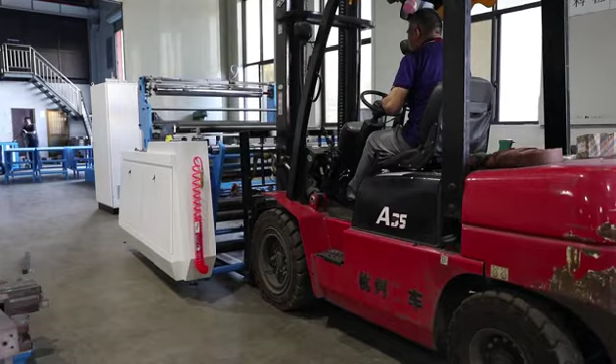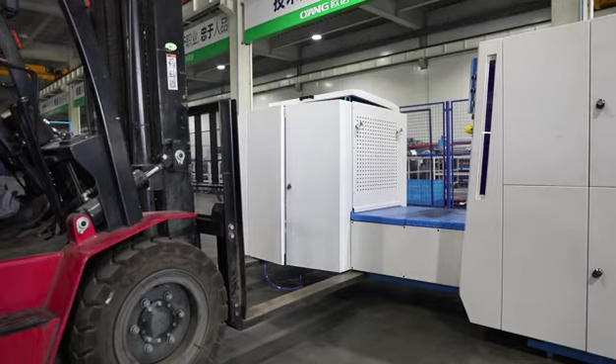Feeding unit fork down demonstration. Main back body folding unit fork up demonstration. Main back body folding unit fork down demonstration. Collection unit fork up demonstration. Collection unit put down demonstration.

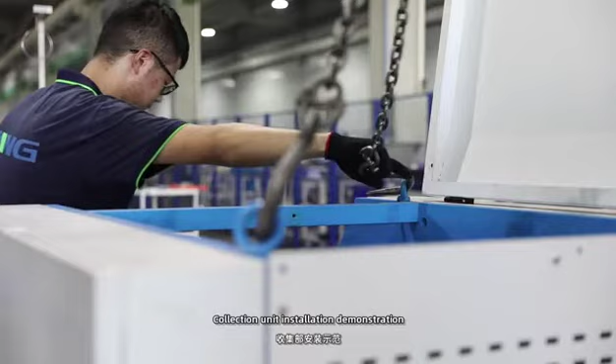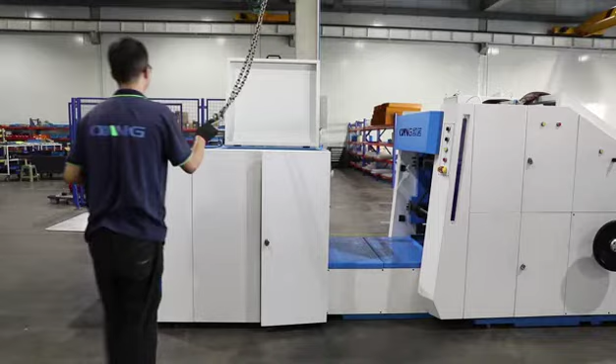Distribution cabinet fork up demonstration. Distribution cabinet put down demonstration. Collection unit installation demonstration. The chain link of the collection unit.

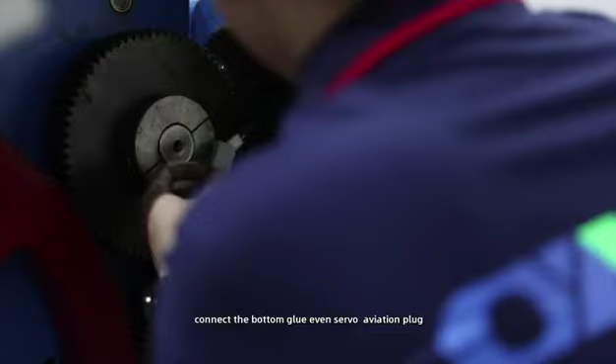Wiring and the connection. Wiring. Remove the wire from the electric cabinet. Pull the cable out of the cabinet according to the path. Connect the bottom glue servo aviation plug. Connect the bottom opening servo aviation plug.

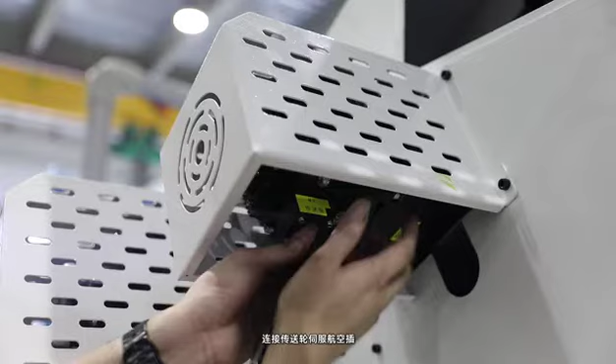Connect the main drive servo aviation plug. Connect the transmission wheel servo aviation plug. Connect the tube cutting servo aviation plug. Connect the traction servo aviation plug. Connect the thumb knife servo aviation plug.

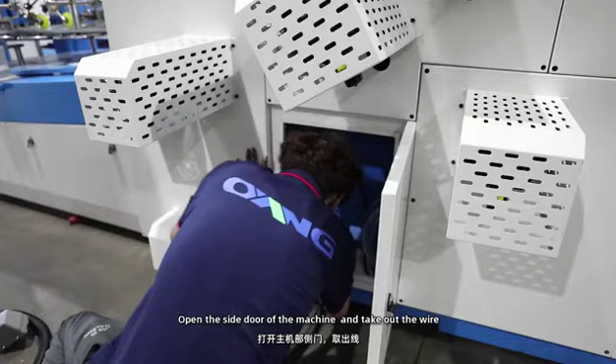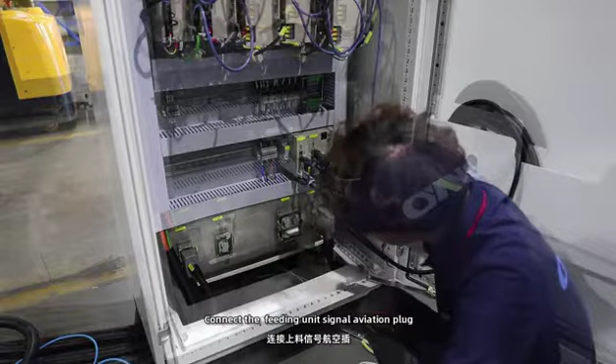Open the side door of the machine and take out the wire. Open the side door of the unwinding unit and take out the wire. Connect the feeding power supply aviation plug. Connect the feeding unit signal aviation plug. Connect the machine signal aviation plug. Connect the communication line. Connect the aviation plug of the vacuum pump.

Connect the color code plug. Connect the main power as required. Turn on the side power supply. Turn on the main power supply. Servo alarms.

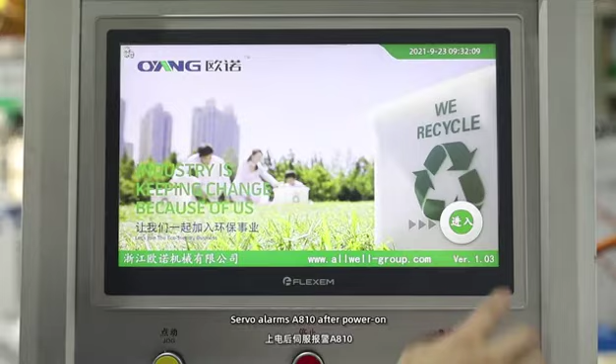A810 after power on. Click on the touch screen to enter. Then click the alarm interface. Then click the servo alarm. Then reset the servo driver with alarm. After the power is off, wait 1 minute and then restart.

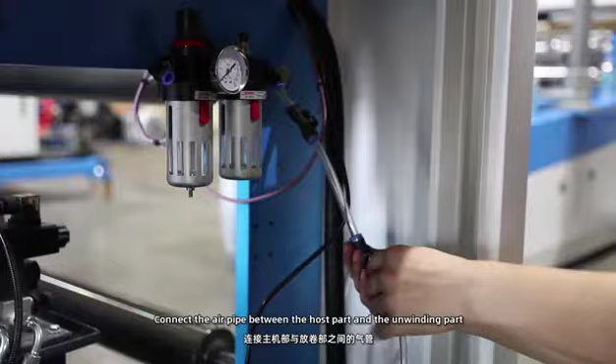Servo alarm clearing. Connect the air pipe between the host part and the unwinding part. Connect the air pipe of the side glue pressure bubble. Connect the main air pipe to the unwinding part.

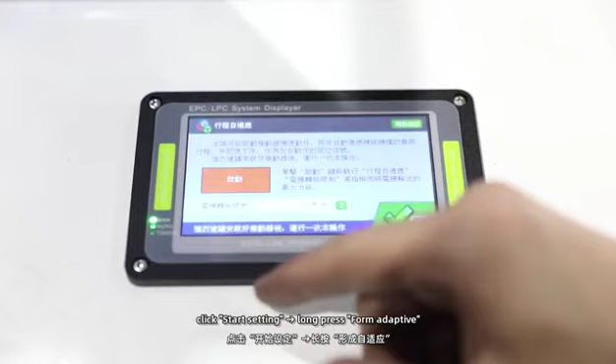Click Setup. Then click Setup Wizard. Click Start Setting. Then long press Adaptive and click Start. The correction system will start to detect limits. Click back after the detection is successful. Then click Next. Click the left and the right arrows.

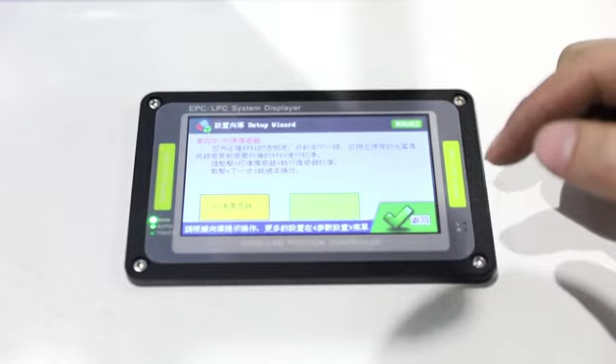The correction device can swing right and left normally. Click Next. Then select photoelectric sensor. Then click Next. Click Next. Then change to automatic mode. Change polarity to plus and change gain value to 20. Double click to return. The setting of the automatic correction system is completed.

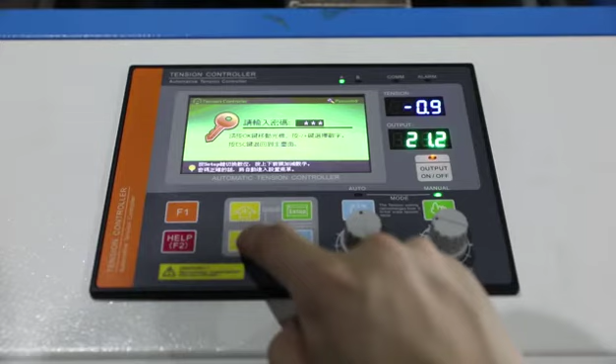Automatic tension system setting. Click Setup. Then enter password 0100. Select checker parameters. Click Setup. Select checker 0 set. Enter the 0 interface. And long press the setup to start setting. Then check value to 0 and click back.

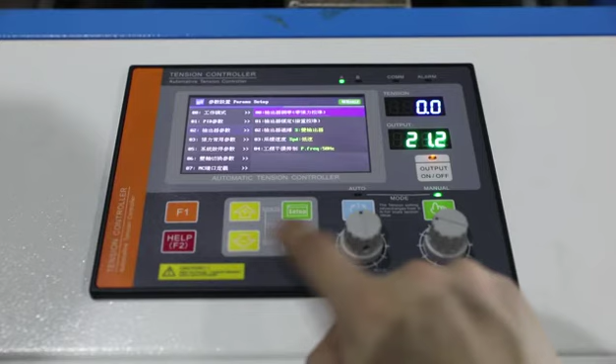Select hand weight calibration. Set weight to 25 kg. Put 25 kg weight through the tension checker. Keep weight fixed. Tighten the rope. Then long press setup. The test value and the set value are 25 kg. The setting of the automatic tension system is completed.

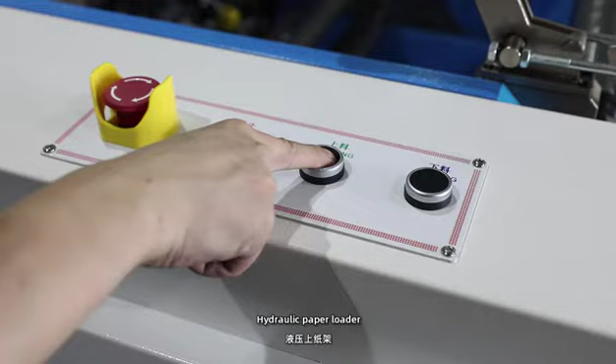Hydraulic paper loader. Long press the feeding and the unloading buttons respectively to check whether the feeding swing arms run smoothly. If there is no abnormality, check whether the oil gauge pressure is 500 to 1000 psi after the loading swing arm is placed at the lowest end. If the feeding swing arm runs stuck, adjust the oil cylinder knob.

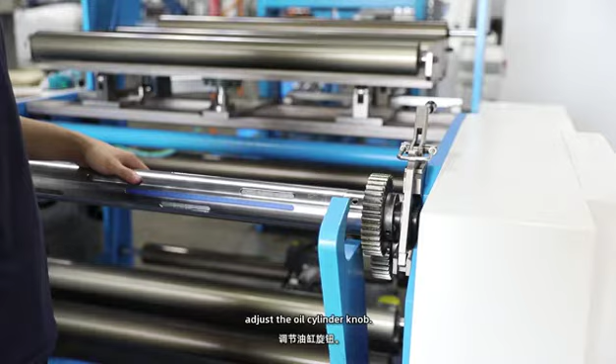Loading the paper. Open the air shaft buckle. Move the air shaft to the feeding swing arm. Long press the unloading button to lower the air swell shaft. Get the air shaft through the paper roll. Move the paper roll to the feeding rack. Long press the feeding button. Lock the buckle on both sides.

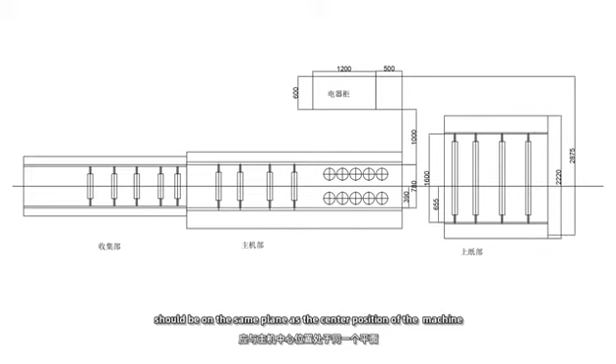Lateral position of raw material: bonding width plus gusset of paper bag plus half surface width of paper bag. Center of the paper bag. The center position of the paper bag should be on the same plane as the center position of the machine.

After the equipment is correctly arranged according to the equipment layout diagram, the distance between the center of the paper bag and the wall board is 655 mm, and the paper roll position is set correctly. Then inflate the air shaft.

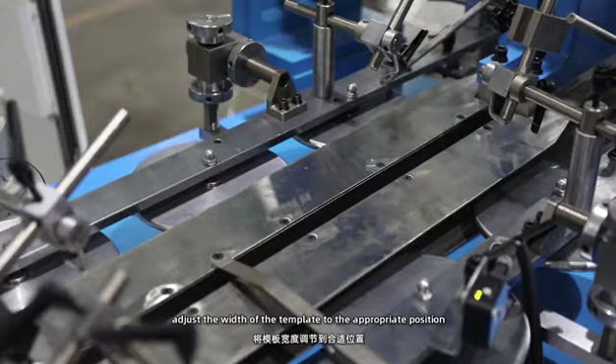Adjust the width of the forming template. Loosen the fixed hand wheel. Rotate the template adjusting hand wheel and adjust the width of the template to the appropriate position. Adjust the toe part of the forming template. Loosen the knob on the stable support arm.

Adjust the support arm so that the forming template is aligned with the center line of the machine and parallel to the wall on both sides of the machine. The width of the toe part of the forming template is slightly greater than the width of the ankle part of the forming template. Check whether the forming template is aligned with the traction wheel.

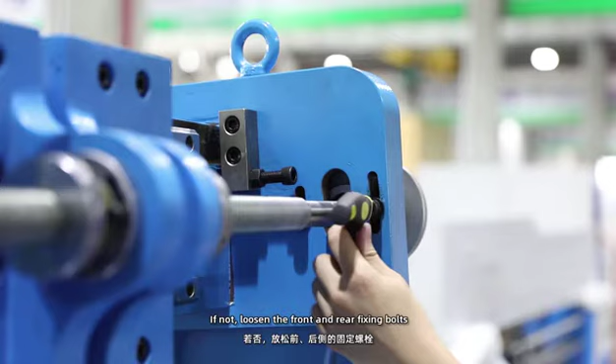If not, loosen the front and the rear fixing bolts, a total of 8 fixing screws. Loosen the fixed nuts of the front and the rear adjusting bolts. Adjusting the screw with clockwise rotation can raise the forming template toe.

Turn the adjusting screw counterclockwise to lower the toe part of the forming template. After setting, relock the fixed nut and bolt.

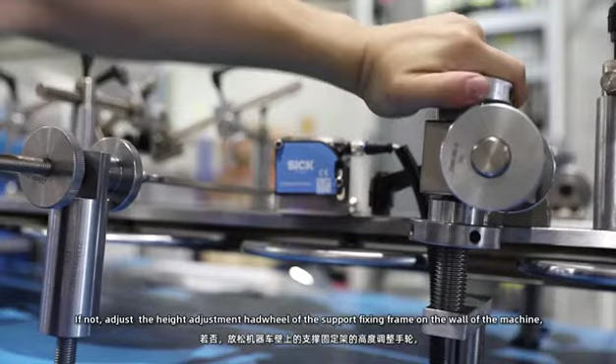Check the height of the clamp side round plate. Check whether the clamping plate is in the center of the two forming templates. If not, adjust the height adjustment hand wheel of the support fixing frame on the wall of the machine, and adjust the support fixing frame upward or downward according to need by using the height adjustment hand wheel. After the adjustment, lock the height adjustment hand wheel. Set the height of the clamp side round plate in 4 positions in turn.

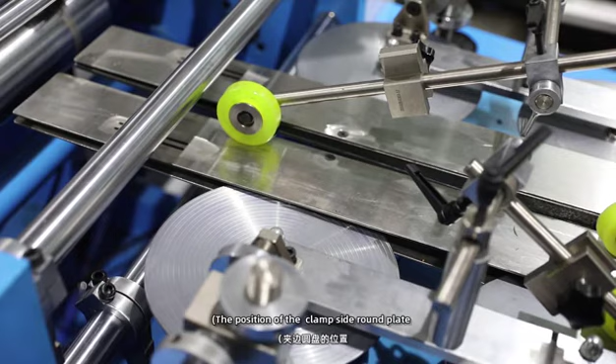Set the lateral position of the clamp side round plate. Loosen the clamping knob on the hand wheel of the clamping side round plate. Rotate the clamp side round plate adjusting hand wheel until the edge of the forming plate is aligned with the correct scale on the clamp side round plate. The position of the clamp side round plate should be half of the side gusset of the paper bag. After adjustment, lock the clamping knob on the adjusting hand wheel.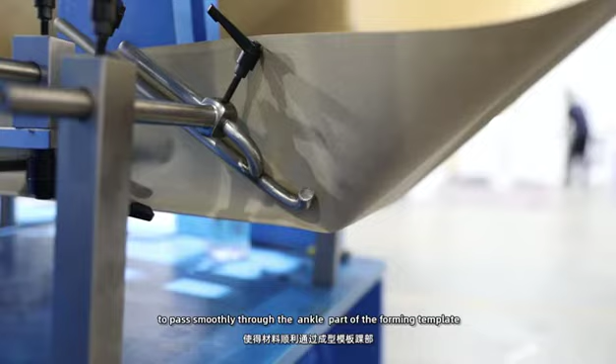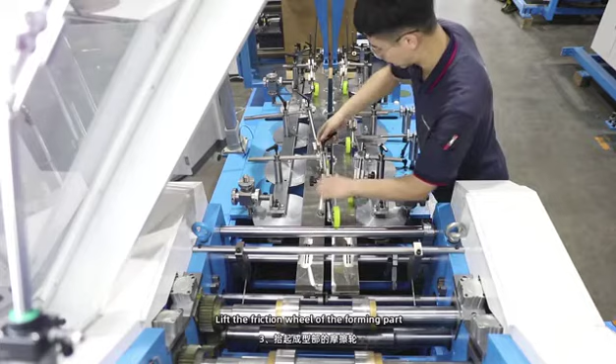Set the guide rod of the forming template. Adjust the screw handle to allow the material to pass smoothly through the ankle part of the forming template. Pull the paper to the traction wheel by steps. Close the tension. Pull the paper roll over the unwinding part through specific paths. Lift the friction wheel of the forming part.

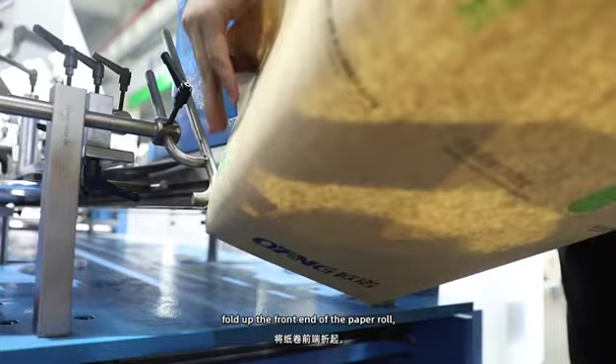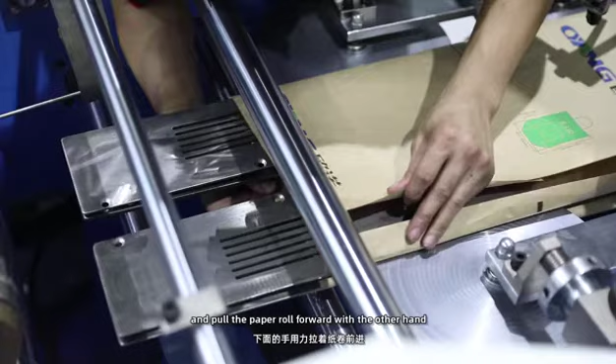Before the paper roll goes into the forming part, fold up the front end of the paper roll. Pull the paper roll out for a distance. Align the center of the paper bag with the center of the host machine, and pull the paper roll into the forming part. Hold the paper roll above the template with one hand. Hold the paper roll below the template with one hand, and pull the paper roll forward with the other hand, until the paper roll is pulled to the traction wheel.

Put down the traction wheel. Put the friction wheel down. Reopen the tension. Set the tension to the appropriate data.

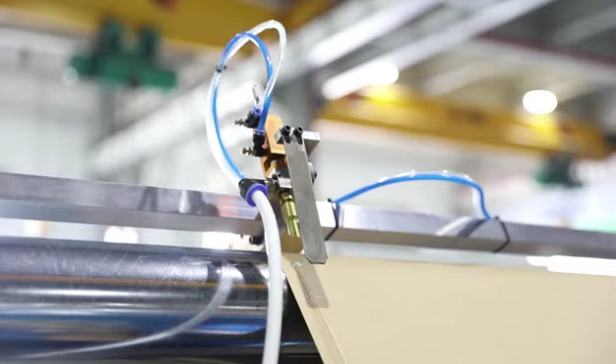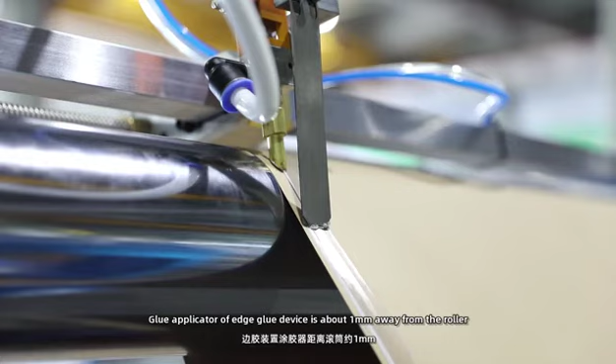Side glue device setting. The knobs of the edge glue device have 3 states. The edge glue device does not work when it is at stop. The edge glue device always works when it is at manual, and in auto the working state of the edge glue device automatically changes with the running state of the equipment. The glue applicator of the edge glue device is about 1 mm away from the roller.

Rotate the side glue adjuster wheel. It can move the glue applicator horizontally on the drum. Move the glue applicator to the edge of the paper tube. Adjusting the knob on the glue applicator clockwise can adjust the amount of the glue. Adjust the knob on the glue applicator counterclockwise to increase the amount of glue.

Adjust the position of the traction wheel. Raise the upper seat traction wheel. Loosen the upper seat traction wheel fixing top wire until the traction wheel is past the paper roll 2 to 3 cm. Lock and fix the top wire.

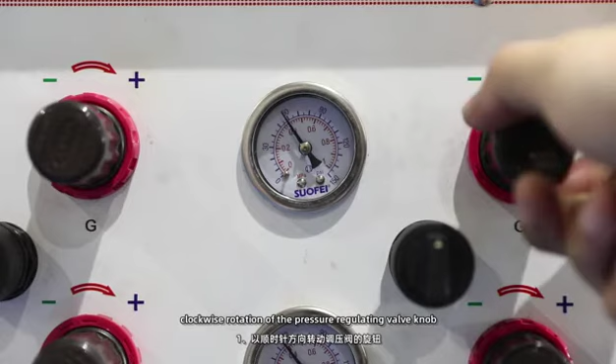Adjust the air pressure of the puller. Clockwise rotation of the pressure regulating valve knob can increase the cylinder pressure. Reduce the pressure on the cylinder by turning the pressure regulating valve knob counterclockwise. Set the cylinder pressure to 40 to 60 psi and set the same pressure on the front and the rear side.

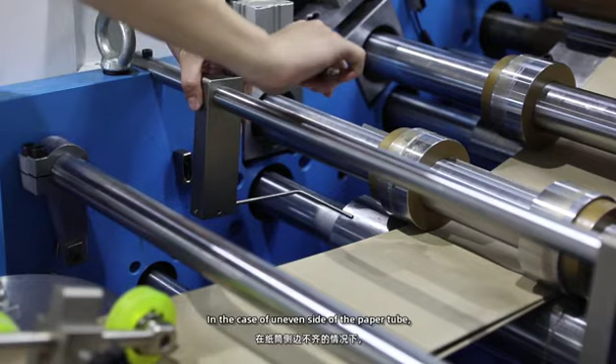Paper rolled. In the case of an uneven side of the paper tube, pry the upper layer of the paper tube or the lower layer of the paper tube. This can make the side of the paper tube aligned.

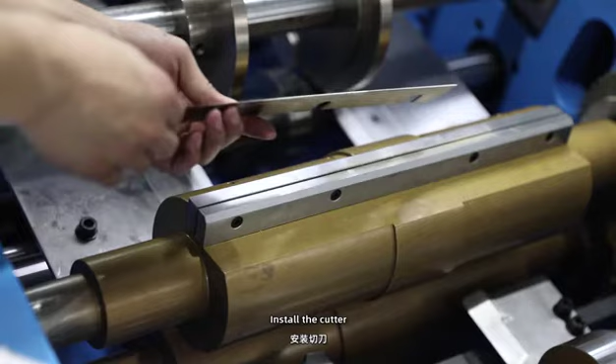Install the cutter. Loosen the bolts of the fixing block. Install the cutter between the fixed blocks. The vertical side of the cutter must be on the leading edge of the rotation direction, and the inclined side must be on the trailing edge of the running direction. Cutter extension length is generally 11 to 12 mm.

Lock the bolts of the fixing blocks. Align the upper and lower cutting rollers. Turn off the cutter servo. Loosen the fastening bolts on the rear wheel hoop of the gear.

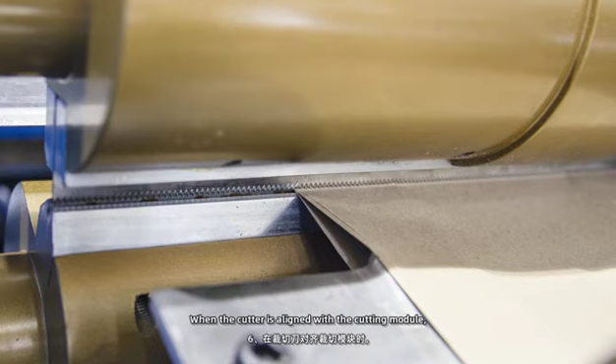Manually turn the roller of the upper seat and the lower seat to align the cutting knife with the cutting module. Lock the fixing bolt of the rear gear hoop. Manually turn the cutting drum to ensure that the cutting knife will not touch the cutting mold. When the cutter is aligned with the cutting module, set the origin of the cutting drum on the touch screen.

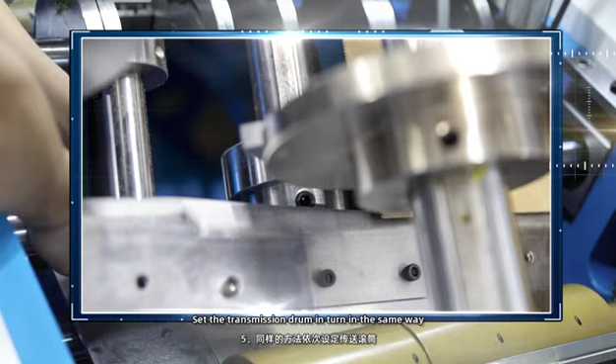Set the lateral position of the transfer drum. Loosen the fixing screws of the conveying drum and move the conveying drum horizontally. Ensure that the transfer drum can be pressed to 4 layers of paper cylinder. Lock the fixing screws of the transmission drum. Move the lower seat transfer drum to align with the upper seat transfer drum. Set the transmission drum in turn in the same way.

Adjust the pressure. Turn off the transfer drum. Manually turn the transfer drum so that the higher part of the upper transfer drum presses the paper tube. Loosen the fixing nuts of the front and the rear square head bolts. Counterclockwise rotation of the square head bolt can reduce the pressure. Clockwise rotation of the square head bolt can increase the pressure. Pull the paper barrel to confirm that the conveying drum can press the paper barrel. Relock and fix the nuts of the front and the rear square head bolts.

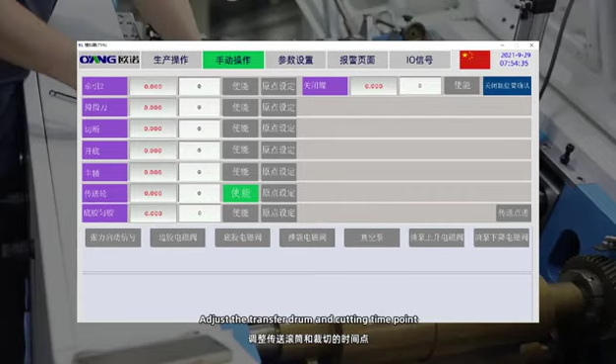Adjust the transfer drum and the cutting time point. Turn off the transmission wheel when the cutter starts to cut the paper tube. The upper transmission drum presses the paper tube first. Rotate the leading edge of the higher part. Set the origin of the transmission wheel on the touch screen.

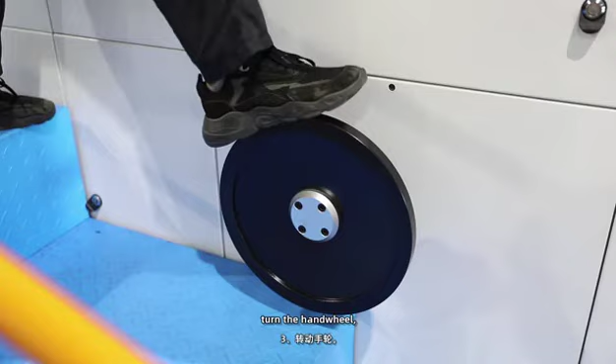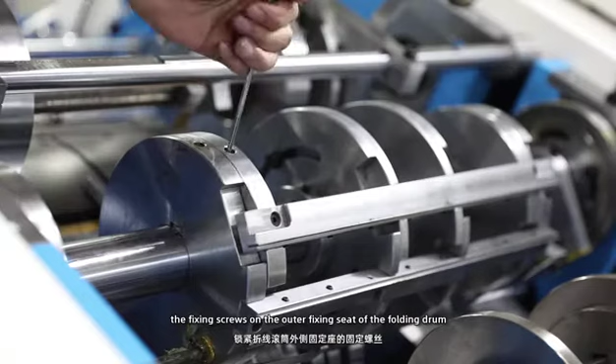Install the folding knife. Put the folding knife into the folding knife groove. Lock the folding knife fixing screw. Adjust the second crease cutter and the second crease groove. Loosen the hex screws on the folding drum, and loosen the fixing screws on the outer fixing seat of the folding drum. The second folding knife can be freely rotated to adjust the position. Turn the handwheel until the second folding knife is aligned with the second folding groove. Lock the hexagonal screw on the folding drum and turn the handwheel. Check the first and the second folding knife are aligned with the folding groove. Check and tighten the fixing screws on the outer fixing seat of the folding drum.

Set the lateral position of the pressure line drum transfer disc. Loosen the fixed screw of the pressure line transmission disc. Move the disc to the outside so that the outside of the disc is just inside the inside edge folding line. Lock the fixing bolt of the transmission disc.

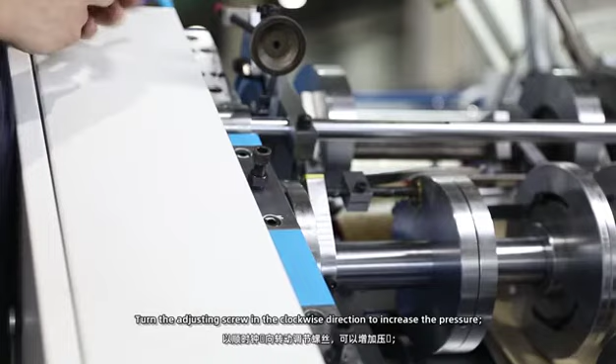Adjust the pressure of the transfer disc of the pressure roller. Loosen the fixed nut of the front and the rear bolts. Turn the adjusting screw in the counterclockwise direction to reduce the pressure. Turn the adjusting screw in the clockwise direction to increase the pressure. Lock the fixed nut of the front and the rear screws after checking.

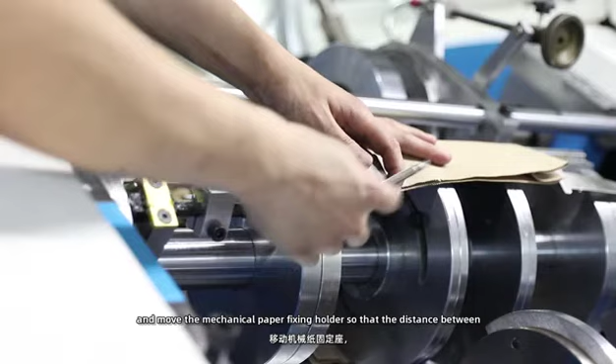Adjust the open edge mechanical finger of the pressure roller. Loosen the fixed screw of the open edge mechanical finger holder and move the holder so that the distance between the mechanical fingertip and the outer edge of the paper cylinder is about 3 mm. Adjust the shape of the mechanical finger so that the mechanical finger can smoothly pick up the clamping part of the paper tube so that the paper tube smoothly moves forward to the guide plate. Lock the screw of the fixed seat of the open edge mechanical finger.

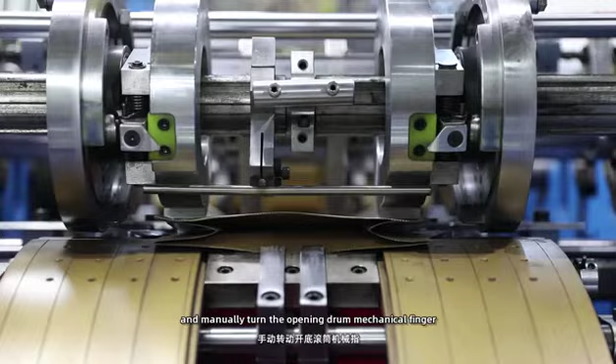Set the lateral position of the bottom roller. Loosen the bolts located on the scale of the cam fixing seat of the bottom opening roller. Move the bottom opening roller sideways to a position 2 mm away from the edge of the paper tube. Tighten the bolts. Setting the origin of the bottom roller. Turn off the enable of the bottom opening drum on the touch screen and manually turn the opening drum mechanical finger to align the mechanical finger.

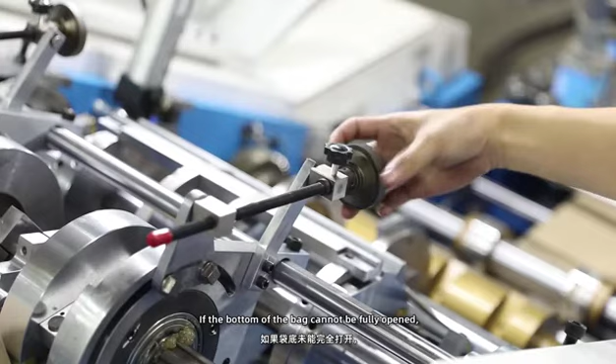Adjust the bottom roller. Check the position of the bottom opening roller mechanical finger clamped on the paper tube and whether it is clamped on the first fold line. If the position of the clamp is behind the position of the first fold line, add adjustment to the bottom opening adjustment items on the touch screen. If the position is ahead of the first fold line, then the bottom opening adjustment will be adjusted on the touch screen. If the bottom of the bag cannot be fully opened, the adjustment wheel must be rotated clockwise. If the paper tube is torn, you need to rotate the adjusting wheel counterclockwise.

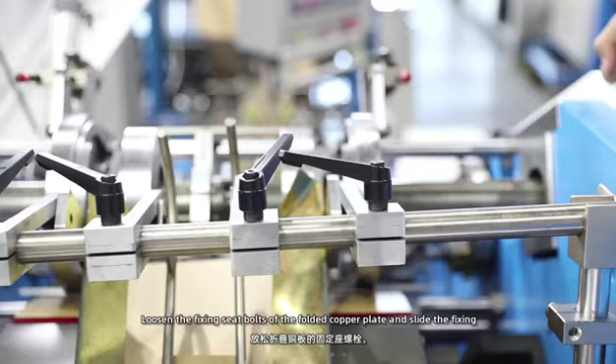Adjust the back bottom folder. Turn the machine so that the back is just under the folder at the bottom of the bag. Loosen the fixing seat bolt of the folded copper plate and slide the fixing seat along the axis so that the inner side of the folded copper plate at the bottom of the bag is about 6 mm away from the side edge of the paper bag. Loosen the fixing bolts of the folded copper plate.

Adjust the position of the folded copper plate at the bottom of the bag so that the bottom of the bag opened by the bag just touches the folded copper plate and start to press the bottom of the bag. The folded copper plate must press the bottom of the opened bag against the surface of the black wheel. Tighten the bolt after adjustment is complete.

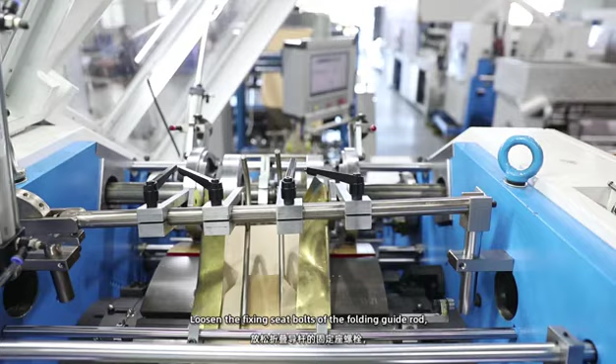Loosen the fixing seat bolt of the folding guide rod and slide the fixing seat along the axis to make the bottom of the bag unfold smoothly. Pay attention that the folding guide rod cannot touch the central crown of the drum.

Paper bag flattening guide. Loosen the bolt on the fixing seat. Move the pressure strip fixing seat so that the pressure iron is located at a distance of about 3 to 5 mm outside of the viscous shape of the bottom of the bag. Tighten the bolt of the holding bar fixing seat.

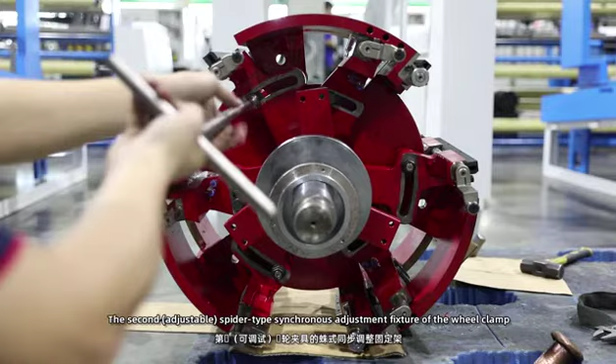The second adjustable spider-type synchronous adjustment fixture of the wheel clamp. Loosen the fixing bolt of the synchronous adjustment fixing frame of the second clamp, and turn the synchronous adjustment fixing frame of the second wheel clamp. The correct distance should be the bottom of the bag minus 7 to 9 mm.

Tighten the fixing bolt on the front side of the drum so that the synchronous adjustment fixing frame of the second wheel fixture is fixed in the correct position. Adjust the wheel mechanical finger. Rotate the machine manually so that the mechanical finger of the black wheel of the first working station reaches the top of the black wheel.

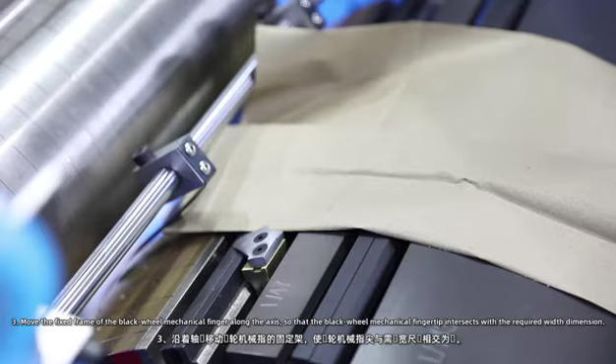Loosen the fixed bolt of the synchronous adjustment fixing frame of the wheel mechanical finger. Move the fixed frame of the black wheel mechanical finger along the axis so that the black wheel mechanical fingertip intersects with the required width dimension. The gap between the wheel mechanical finger body and the cam is 3 to 4 mm. When tightening the bolt on the wheel, be sure to keep the required width of the paper bag.

Rotate the machine manually so that the middle finger is on the top of the wheel. Loosen the 6 bolts of the middle clamp finger fixing frame. The distance between the top of the middle clamp finger and the first clamp line is the length of the bottom fold of the bag 3 to 5 mm, and tighten the bolt after adjustment.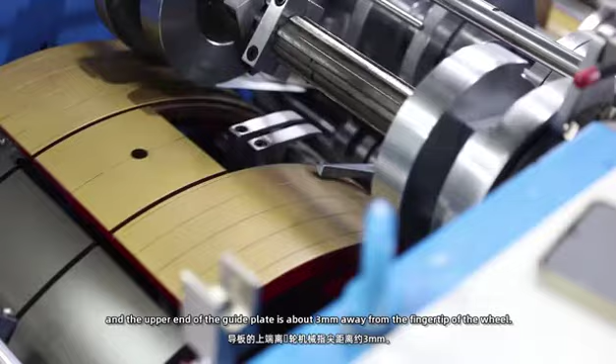Adjust the position of the paper roll guide. Loosen the fixing bolt of the paper tube guide plate. Move the guide plate along the axis so that the lower end of the guide plate enters the side of the paper tube 2 to 3 cm, and the upper end of the guide plate is about 3 mm away from the fingertip of the wheel.

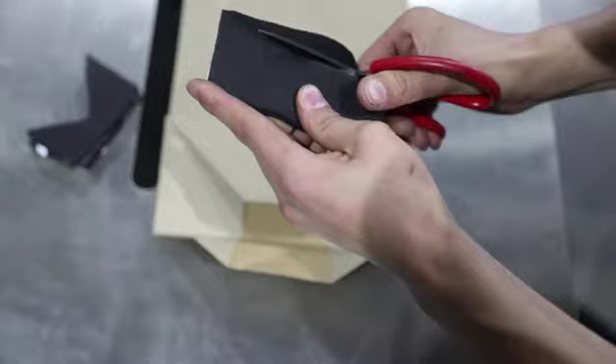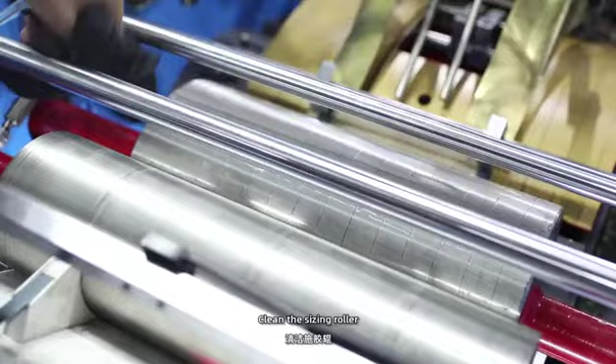Install the soft cushion of the bottom coated side of the bag. Cut the soft cushion on the foam material according to the required glue shape. Clean the sizing roller. Paste the foam cushion on the appropriate position of the sizing roller. Rotate the machine to check whether the gluing is normal. If not, repaste the sponge cushion to a suitable position.

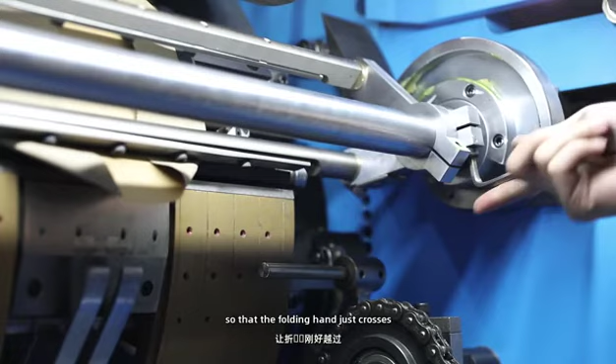Adjust the time to fold the fixture. Loosen the fixing bolt on the fixed frame of the first fold, close to the first clamp of the opening wheel, so that the folding hand just crosses the trailing edge of the first clamp of the opening wheel when it is opened, and align the first fold line on the paper tube. Tighten the bolt of the first folding fixing frame. Adjust the second folding knife in the same way.

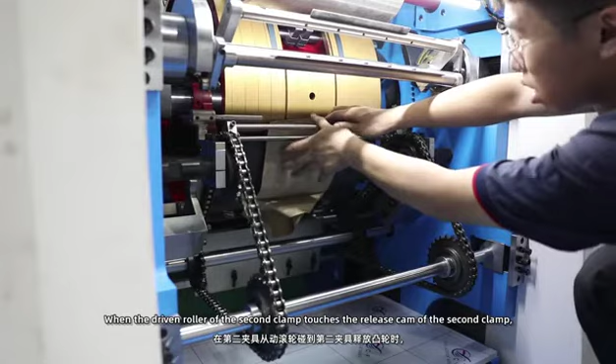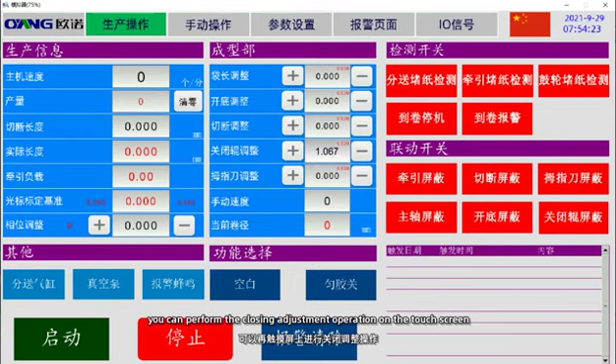Closing device. Turn off the enable of the closing roller servo. When the driven roller of the second clamp touches the release cam of the second clamp, move the bottom closing roller of the back to cross the second clamp. Reopen the enable of the closing roller. Rotate the machine to confirm the closing action of the first fold. If you need to fine-tune the closing roller, you can perform the closing adjustment operation on the touch screen.

Adjust the pressure of the distribution wheel. Click distribution cylinder on the touch screen to drop the distribution wheel, and loosen the fixing nut of the stop bolt on the front and the rear sides. Turn the stop bolt in a clockwise direction to increase the pressure, or turn the stop bolt in a counterclockwise direction to reduce the pressure.

Collection department. Adjust the faceplate. Loosen the fixing bolt of the flower plate. Adjust the gap of the flower disc to the back that comes out. Tighten the fixing bolt of the faceplate.

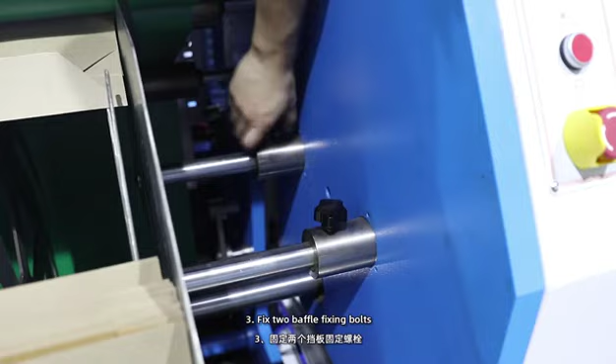Adjust the back receiving baffle. Loosen the two baffle fixing bolts. Move the back receiving baffle inward or outward to a suitable position according to width of the back surface. Fix two baffle fixing bolts. Equipment installation and debugging.